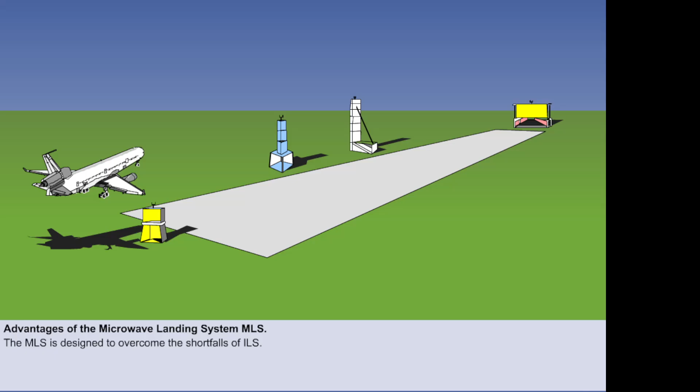In 2009, London Heathrow was the only civil airport using the system. Advances in another landing system, the Local Area Augmentation GPS system, may, however, influence the decision of other airports, especially in the USA, as to whether or not to introduce MLS.

The universally installed ILS has several disadvantages. These are: there are only 40 channels available worldwide. The azimuth and glide slope beams are fixed and narrow. As a result, aircraft have to be sequenced and adequately separated, which causes long delays. There are no special procedures available for slower aircraft and short takeoff and landing aircraft.

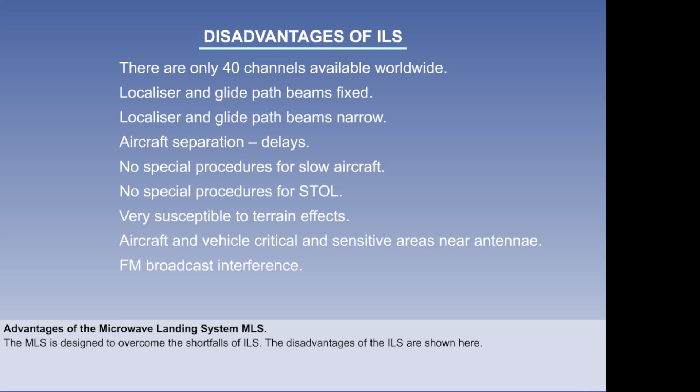ILS cannot be sited in hilly areas, and it requires large expanses of flat, cleared land to minimize interference with the localizer and glide slope beams. Vehicles, taxiing aircraft, low-flying aircraft and buildings have to be kept well away from the transmission sites to minimize beam bending. It suffers from FM broadcast interference.

The MLS has the following advantages over the ILS. It is not subject to siting problems, and because of its small size, can be sited on the taxiway side of the runway. It operates in the SHF band, and so is not affected by ILS or FM transmissions.

200 channels are available, 5 times the number available for ILS. It is available to light aircraft, helicopters, and short takeoff and landing aircraft.

Further advantages are that aircraft can choose various approach routes. Landing delays in poor weather are reduced. Installation costs are much lower. It has a built-in DME. Equipment failure is indicated by flags. Flare and back azimuth functions are possible, but not currently implemented.

The azimuth coverage is much greater than conventional ILS. It is 40 degrees either side of the runway QDM, and it extends out to between 20 to 30 nautical miles, and up to a height of 20,000 feet.

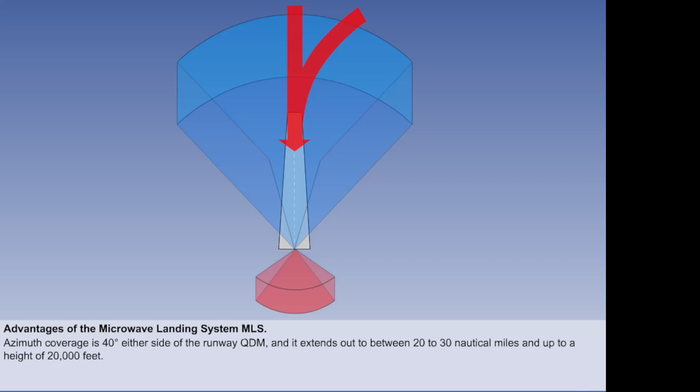The elevation transmission provides a wide range of glide slope angles, from 0.9 degrees up to 20 degrees. And as the elevation signal extends through the whole of the azimuth coverage, it provides precision glide slope guidance at all points where azimuth guidance is available.

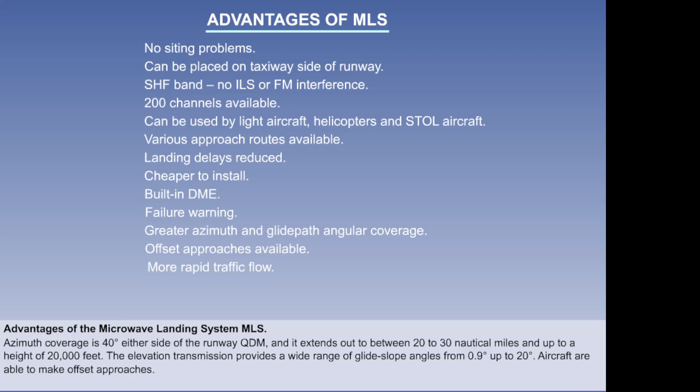Aircraft are therefore able to make an offset approach. That is, they can join the approach procedure as close as 2 nautical miles from the airfield. This allows greater traffic flow, quicker approaches, and may improve noise abatement.

A secondary system is provided to give go-around and departure guidance up to 20 degrees either side of the runway direction, up to 15 degrees in elevation, to a height of 10,000 feet and with a range of 10 nautical miles.

An additional advantage of MLS is the ability of the system to transmit auxiliary data such as station identification, which always starts with M for MLS, system condition, runway conditions, wind shear and weather.

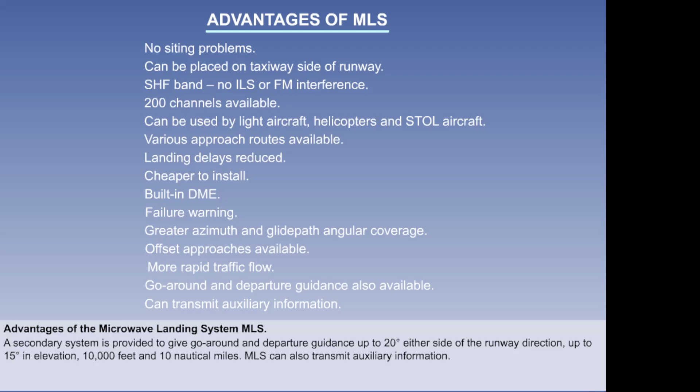The ground components define a coordinate system in space, and the aircraft's position in this reference frame is fixed by airborne equipment. The 3 space coordinates are azimuth angle, elevation angle, and distance from a reference point on the airport, and they are generated by separate subsystems.

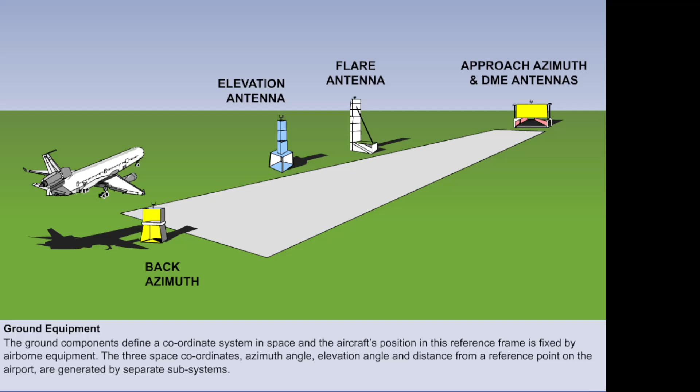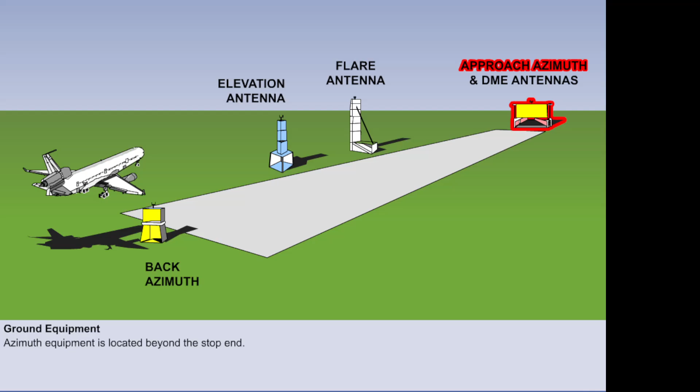The forward azimuth subsystem is located beyond the runway stop end, on the extended centerline and radiating in the approach direction. It defines azimuth position.

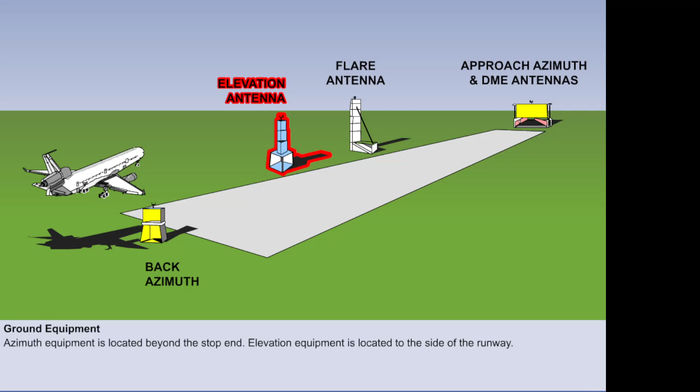The elevation subsystem, located to one side of the runway and also radiating in the approach direction, defines the elevation angle. A DME beacon is co-located with the azimuth element, and it supplies slant range distance from that point.

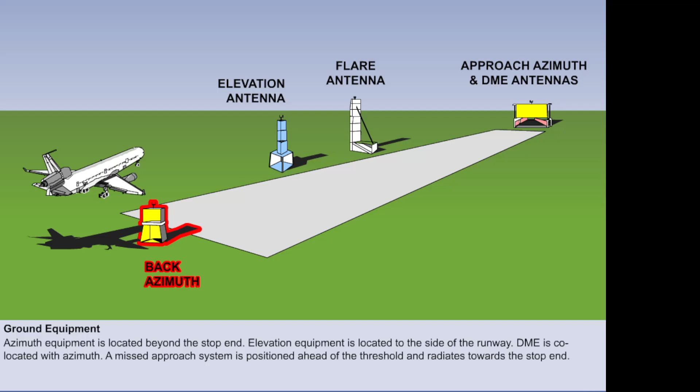The range of these systems is approximately 20 nautical miles. A missed approach azimuth subsystem, located ahead of the runway threshold and radiating towards the stop end, provides guidance for missed approach maneuvers. A flare subsystem near the elevation element is designed into MLS, but ICAO have stated that it is not intended to be implemented.

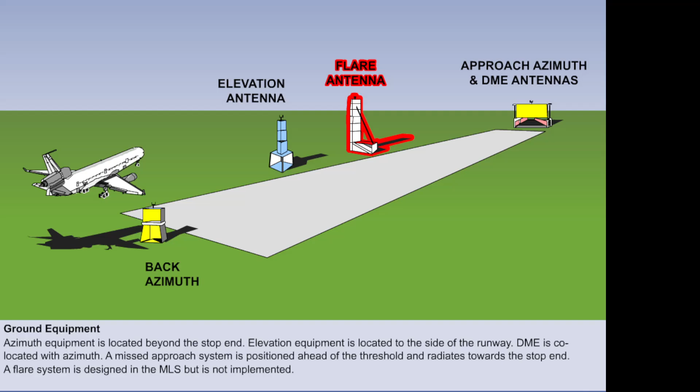The airborne equipment is designed to continuously display the position of the aircraft in relation to the pre-selected course and glide path, along with distance information during approach as well as during departure.

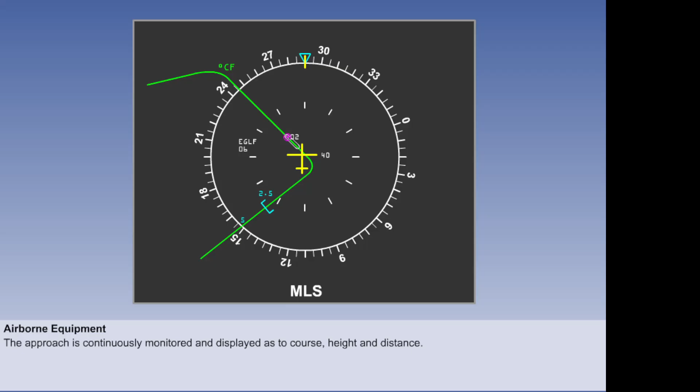Aircraft fitted with MLS equipment, such as Airbus, will display the information on their electronic navigation screen. The display is similar in principle to the ILS, in that it shows if the aircraft is too high or low.

However, it is different from the ILS in that the indications of right or left are given relative to the selected course. So here, for instance, we initially get a command to follow the offset course until we are in line with it. The indication we see here is turn left, because the runway is left of the aircraft's course.

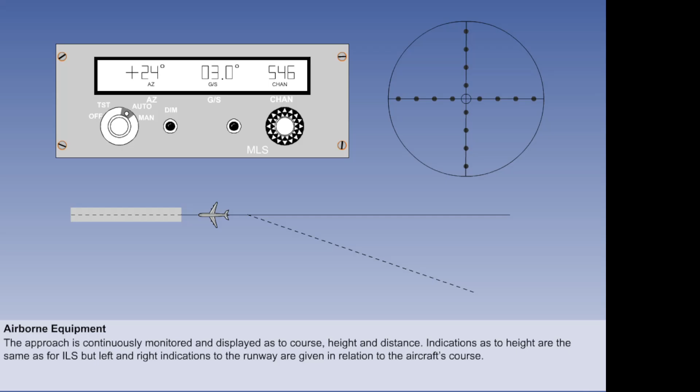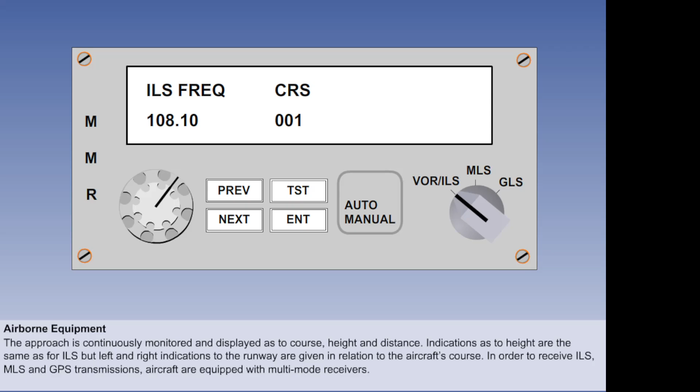The receiver control unit looks like this. Alternatively, in order to receive ILS, MLS, and GPS transmissions, aircraft are equipped with multi-mode receivers and a combined control unit for ease of use by the flight crew.

The system is very accurate, giving a minimum 95% lateral accuracy of no more than 20 feet either side of the center line at the approach reference datum, which is 50 feet above the threshold at the center line. ICAO recommend an accuracy of 13.5 feet. Degradation can be no more than twice this figure at 20 nautical miles, the coverage limit.

The vertical accuracy at the same datum is plus or minus 2 feet, and at 20 miles degradation must be no more than 0.2 of a degree on a 3-degree glide slope.

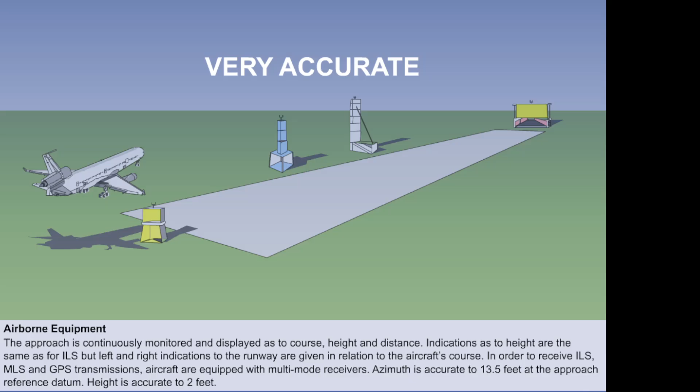MLS employs the principle of time division multiplexing, whereby only one frequency is used on a channel, but the transmissions from the various angle and data ground equipments are synchronized to assure interference-free operations on the common radio frequency.

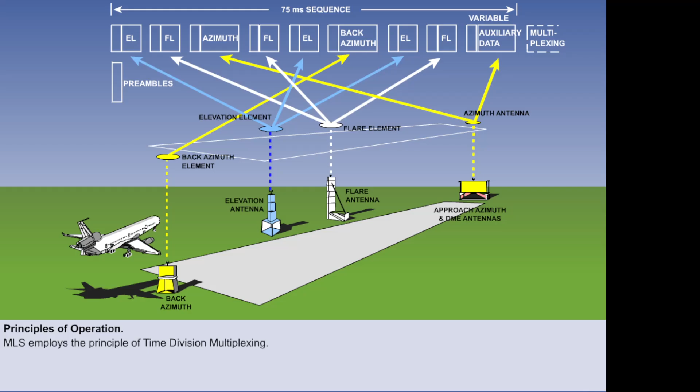Azimuth and glide slope location are both achieved in the same way, by the use of time-referenced scanning beams. The azimuth beam starts its to-sweep at one extremity of its total scan and travels at a uniform speed to the other extremity at a scan rate of 13.5 scans per second.

It then starts its fro scan back to its start position. The time interval between the reception of the to and fro pulses is proportional to the angular position of the aircraft in relation to the runway on course line.

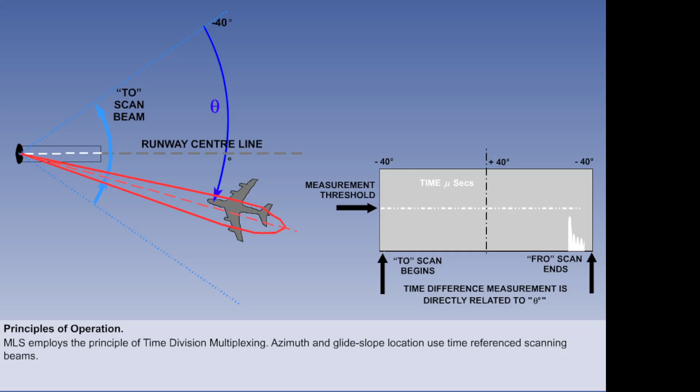So, the maximum time interval between the passage of the to and fro beams would be measured when the aircraft is at the extreme left of the coverage, and minimum time when the aircraft is at the extreme right-hand edge of coverage. The same principle is used for the elevation calculation, but the scan rate is 40.5 scans per second.

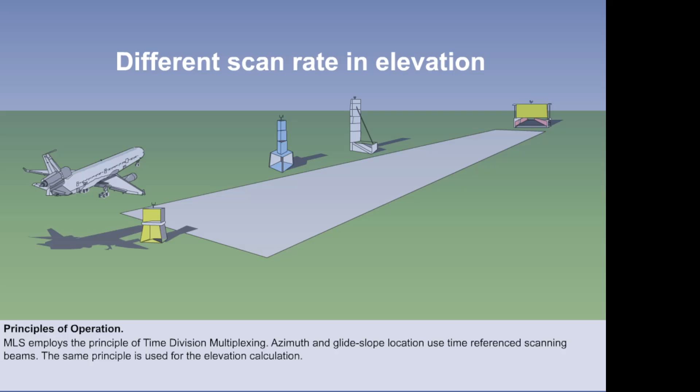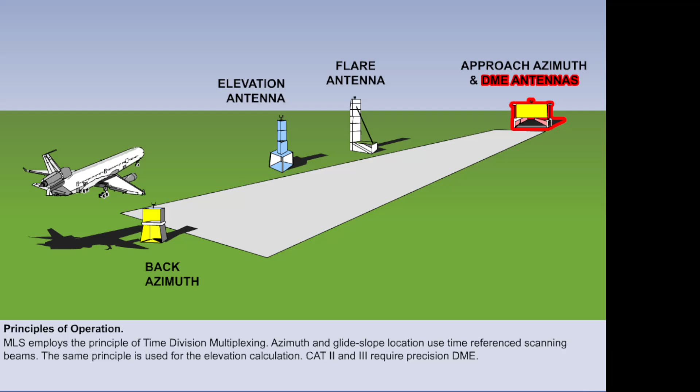The distance of the aircraft from the threshold is provided by DME. For Cat 2 and Cat 3 approaches, a precision DME, DMEP, accurate to within 100 feet must be available.

The number of channels available for MLS is 200, spaced 300 kHz apart, from 5031.0 MHz to 5090.7 MHz in the super high frequency band. The wavelength is about 6 centimeters.

Since the basic technique is that of time multiplexing, all functions can take place on a single channel. Essentially, each function in the time-spaced transmission is a separate entity and is preceded by identification preamble. The receiver can therefore recognize each element of the sequential transmission.

The emission designators for MLS are N0X, the unmodulated carrier, and G1D, the data transmission component.

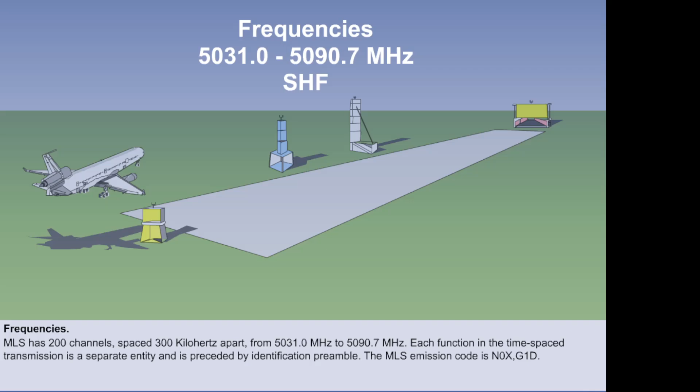These are the main points to remember. The basic principle is a time-referenced scanning beam. The frequencies used are 5031.0 MHz to 5090.7 MHz in the super high frequency band.

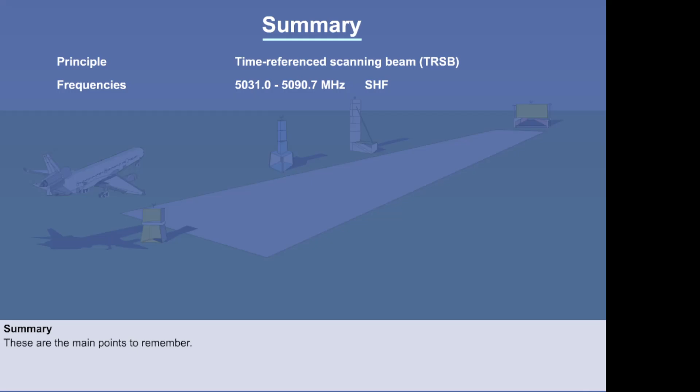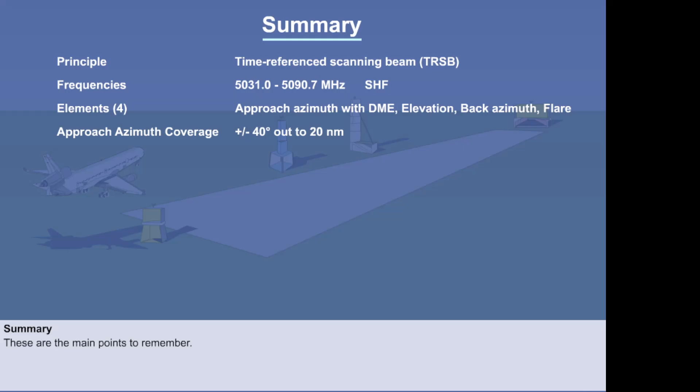The four elements are the approach azimuth with DME, the elevation, the back azimuth, and the flare. The approach azimuth coverage is plus or minus 40 degrees, out to 20 nautical miles. The elevation coverage is up to 20 degrees, up to 20,000 feet.

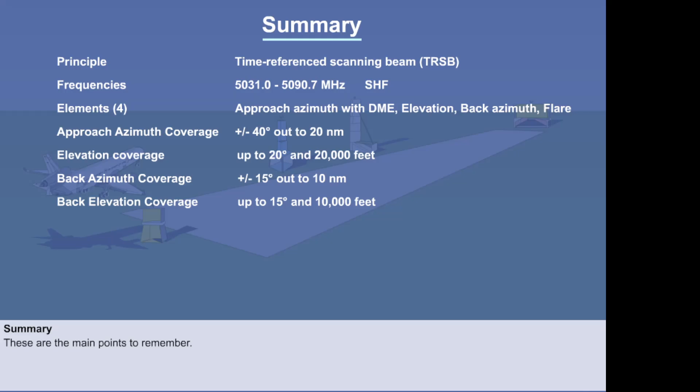The back azimuth coverage is plus or minus 15 degrees in azimuth, out to 10 nautical miles, and up to 15 degrees elevation, up to 10,000 feet. The primary advantages are a flexible approach direction, a flexible glide path angle, no sighting problems, and no FM interference.

This concludes the lesson on MLS.